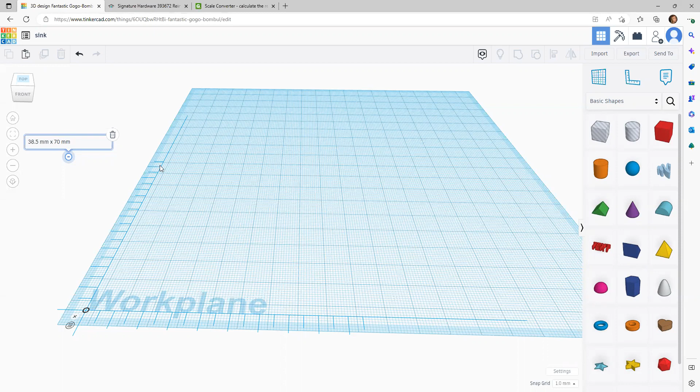We're close to 70, so I'm just going to round to 70. It didn't give us how deep the sink is, so I'm just going to eyeball it. This one here, 20 millimeters, is a little bit less than an inch, so if you're familiar with an inch, this is just slightly less than that.

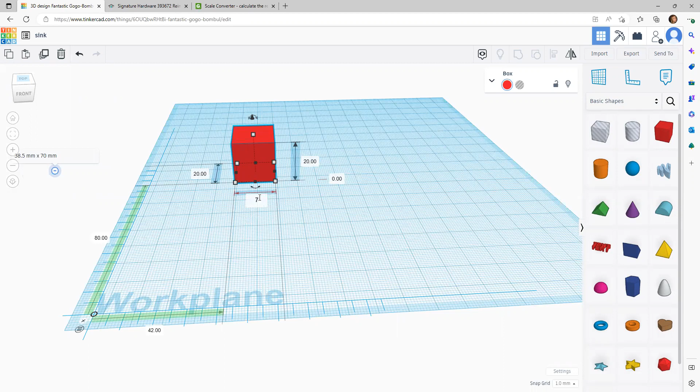Now we want it to be... I've already got my ruler on here, I should have showed you guys that. Click your ruler on down here and it will give you the measurements of your object: 70, 38.5.

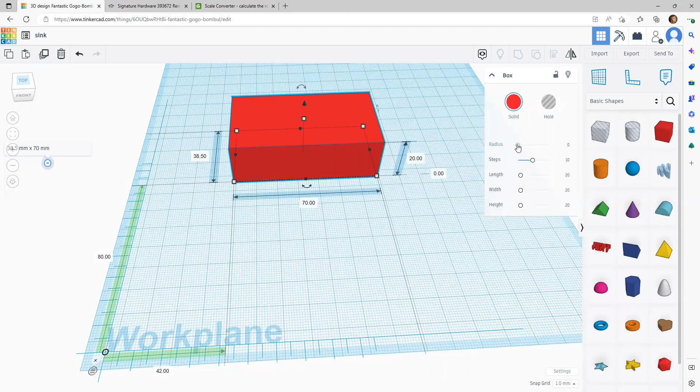Now, the sink had those nice rounded corners, and we can make those adjustments up here with radius. However you adjust this, it bevels all the edges. You see that? So the thing is, it's not just beveling these outside edges—if you look, it's got a nice pillow shape, beveling every edge.

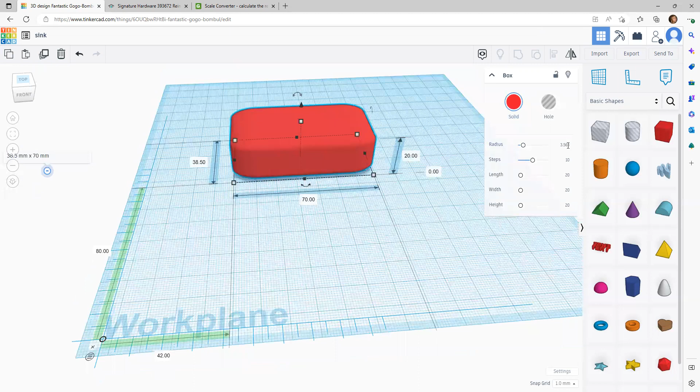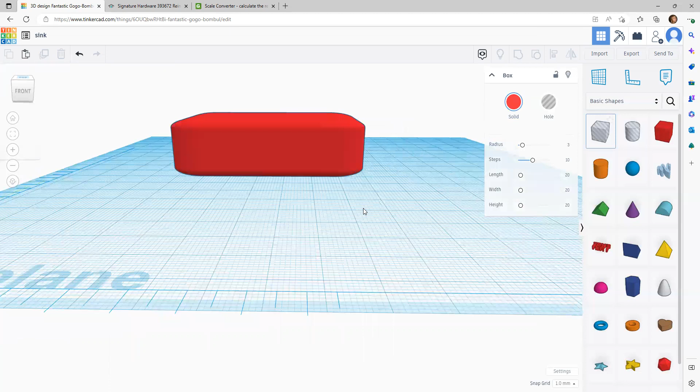So what I'm going to do is use the hole feature to cut this into a slab. I think I'm pretty good with the way that rounded bit looks, so let's make a slab by clicking on our hole over here. We want it to be the same size as the sink—we only want to cut off that bevel.

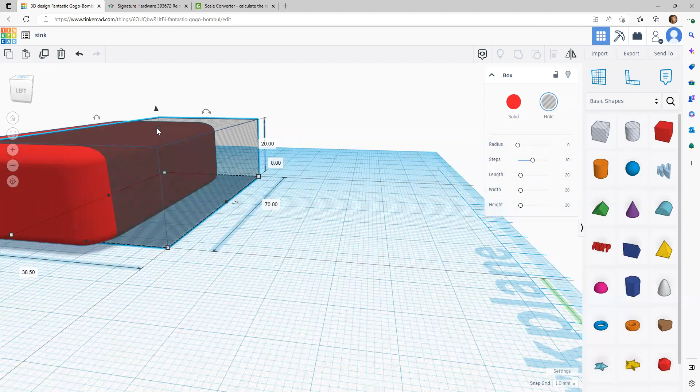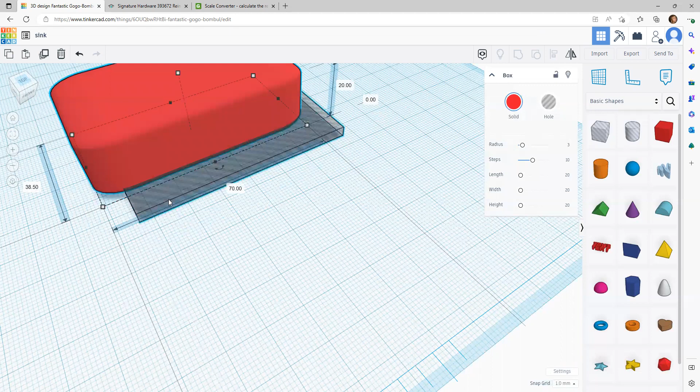So let me turn it to the side. You grab—see the box right there? You can either change the size here, or grab this little box. Then you can select both objects by either clicking on one, holding the shift key, and clicking on the other. There we go. Or you can start out here in blank space and click and drag, and it grabs both. I'm going to come up here to align so that my hole completely covers this whole thing.

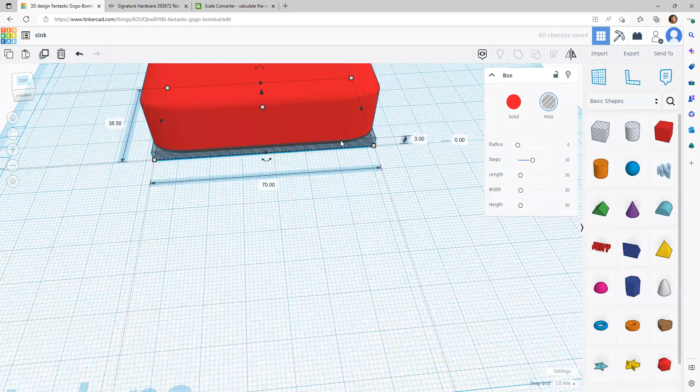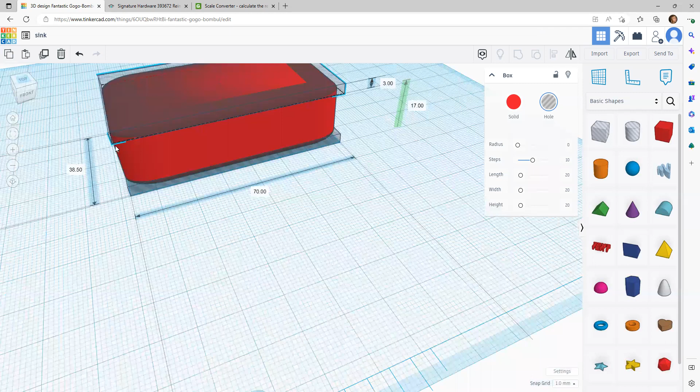Then let's duplicate it because I want to make the top flat too. Let's pull it up—see those little triangles? You can see over on the side, the distance from the ground starting to show. I get as much as I wanted, looks like it. All right, now let's grab all of these objects and use the group feature.

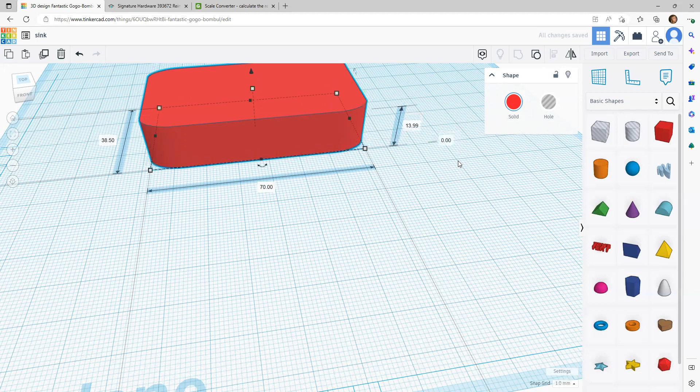Now I am rounded on just the sides and flat on the top and the bottom. And because the hole I used to cut the bottom off was 3 millimeters thick, now I'm floating 3 millimeters in the air, so I'm just going to change this to 0 and get my feet back on the ground. Now I want the front of the sink to have that nice curve, but I want the back of the sink to be straight, so we're going to do the exact same thing and use a hole to cut that off.

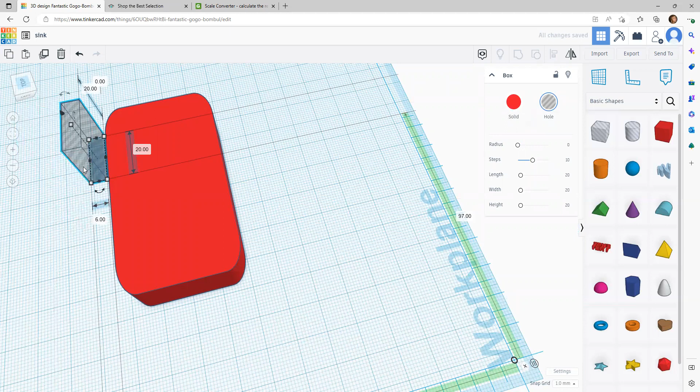Let's see, I'm gonna do 6 right there, and let's make it 70 long. And then let's grab it, lining like before, and you can see I'm past that curve so that I'll have a nice flat back. Select them both and group.

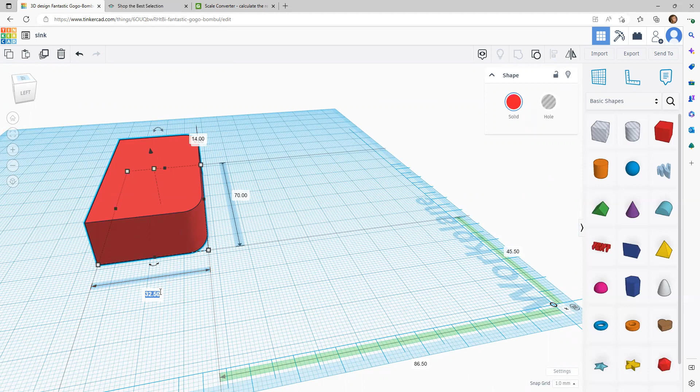Now, we were at 38.5 and I cut 6 off. So if I put this back, it is going to change this curve a little bit, but only a little bit. And I still think it looks very nice.

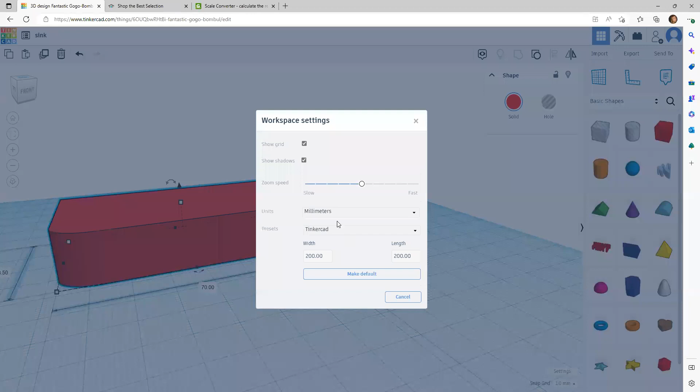So there is the basis for our sink, and it's only 14 deep now. So let's say we want it to be an inch deep. If I know how many millimeters make an inch off the top of my head, I can type it in there. Or I can be a cheater and come down here to settings, change this to inches, make this say 1, by way deeper than we want, and then go back to millimeters.

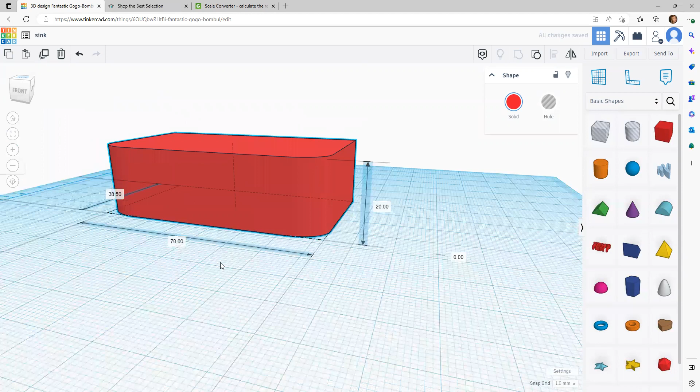And that gives me a sink that's a foot deep, which is too deep, but I was just showing you how I cheat when I'm trying to jump around between inches and millimeters. I really feel like 20 was a good depth for the sink.

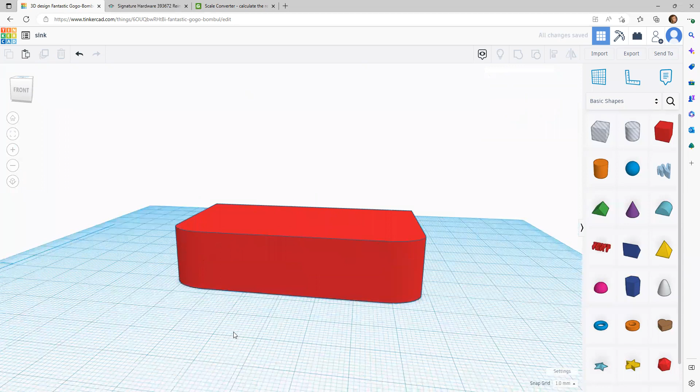And maybe if you already know the size of your cabinet you're going to put it in, you know how deep you want it to be. Maybe you only want it to be 16. Either one works. Okay, let's put the hole in the middle of our sink.

We're going to duplicate this shape by pushing the copy up here. And we're going to turn it into a hole.

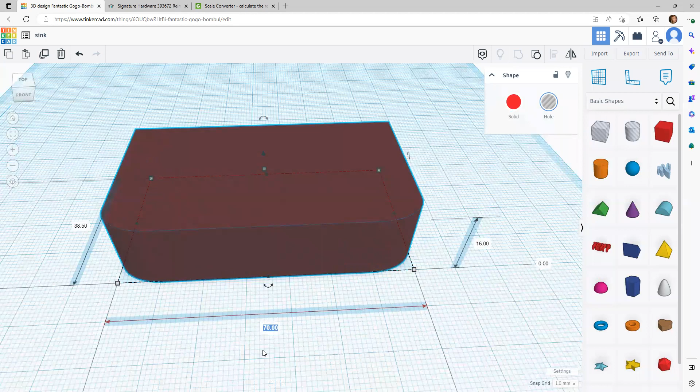And then we have to decide how thick we want the edges of the sink to be. I think 3 millimeters will make it seem nice and thick, so I'm just going to go with that. And since we need 3 on each side, that means we have to subtract 6. So 64.

And then let's keep it even. Let's take 6 off of here, 32.5. Select them both and align.

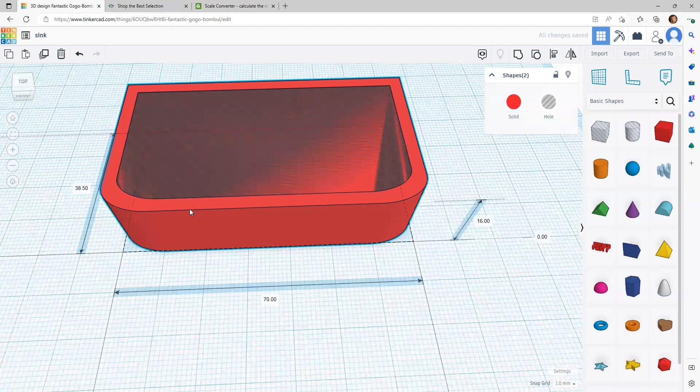Okay, now if I just group this, both of these are on the ground — that's what I'm trying to show you. It won't work. It's just going to make like a sink-shaped tube.

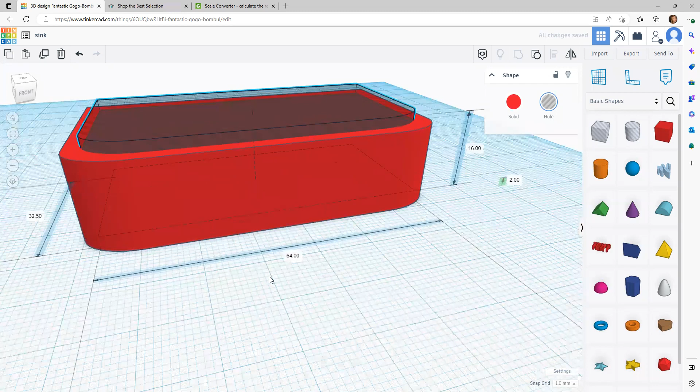So we need to raise the hole up off the ground, however thick you want the bottom of your sink to be. Then we'll have a little sink-shaped box. Select them both and group them. There is yours.

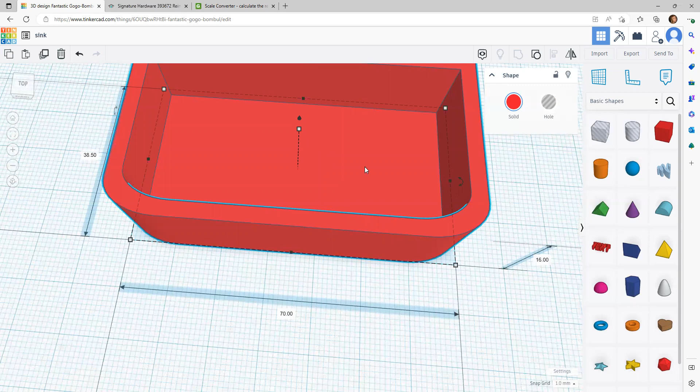Okay, let's put a little drain hole in our sink. And that's pretty easy too. We've just made the bottom of the sink 2 millimeters.

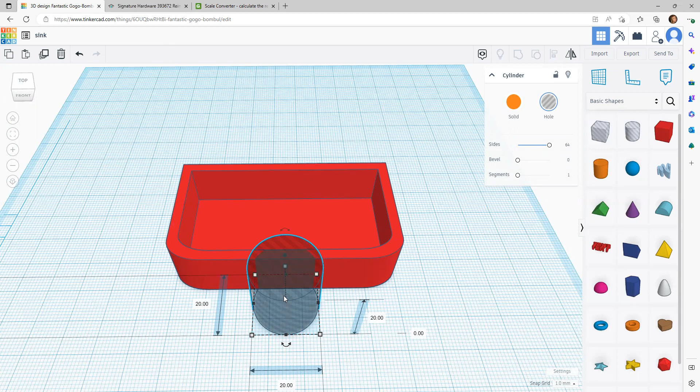So let's grab our cylinder and we're gonna turn the sides up as high as they go so that it gets nice and smooth and round. And then I honestly have no idea how big a sink hole is supposed to be, the drain hole, so I'm just gonna make one up.

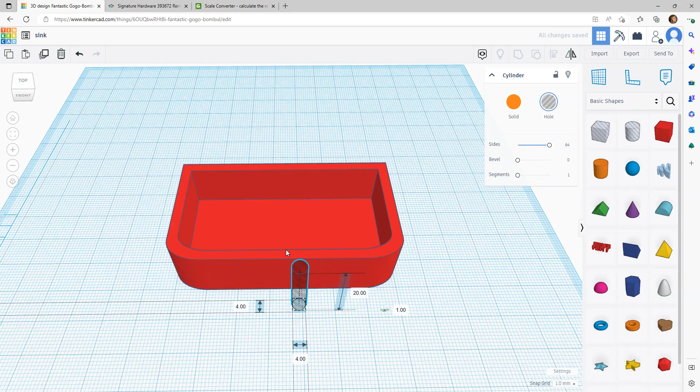Then I'm gonna lift it off the ground, not the whole way, because I want it to be indented in the sink, but a little bit so it doesn't go the whole way through. Although if you do want it to go the whole way through, you could do that.

Now we're gonna select them both just like before, and I love this align feature. It makes everything simple. We have a tiny little hole for the sink.

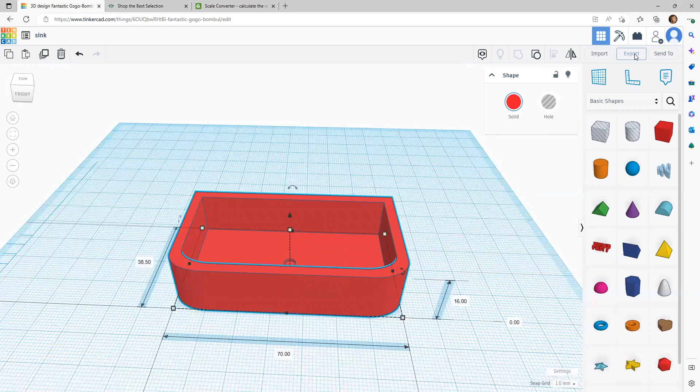And if you're ready to print just like that, all you need to do is come up here to export and choose STL, and it will go to your downloads folder on your computer. And then you can open the STL folder in your slicer.